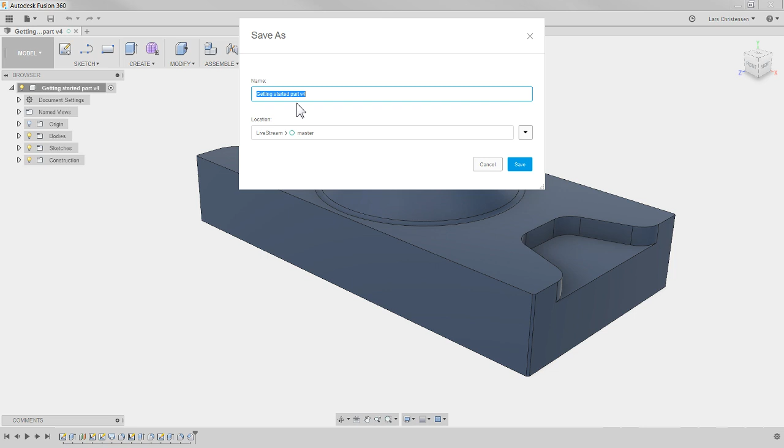So what I like to do is to go out and do a Save As, and then just give it another name. Let me just save this and get out of here. Oh, actually it was called up. Okay, so there's our original here, and then our new one comes right up here in the tree. So I kind of separate the two models out.

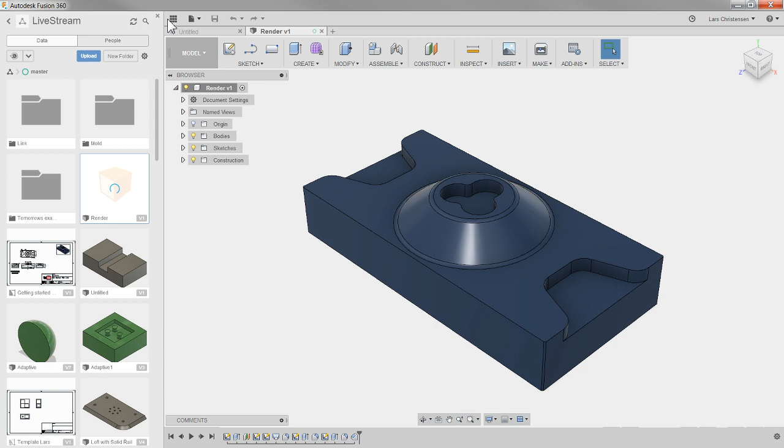All right, so this is for an absolute beginner. If you've never used the rendering inside of Fusion, I will kind of take you through the different steps. And by the way, there's some people watching these live streams who are absolutely awesome at this rendering. Feel free to share any of your models either in the live stream or in the comment area below. So this is the render workspace of Fusion 360.

Down in the bottom here, you get a rendering gallery that will give you a couple of shots of this model. This is also where many of your renderings will end up. I'm just going to minimize it by hitting this little box here because I want to get my interface.

Now I'll take you quickly through what each of these does, and then we'll go back in and play with them a little bit later.

The first one, you might already be familiar with this beach ball. That's the appearances, and it's the same appearance as we have if we were inside the model environment - we right click and do appearance. You'll see I already have an appearance on this model right now. I made it blue. By default, it is steel inside of Fusion, but for that CAM tutorial I just did, I wanted it to look a little different and not gray. There's enough gray on the shop floor.

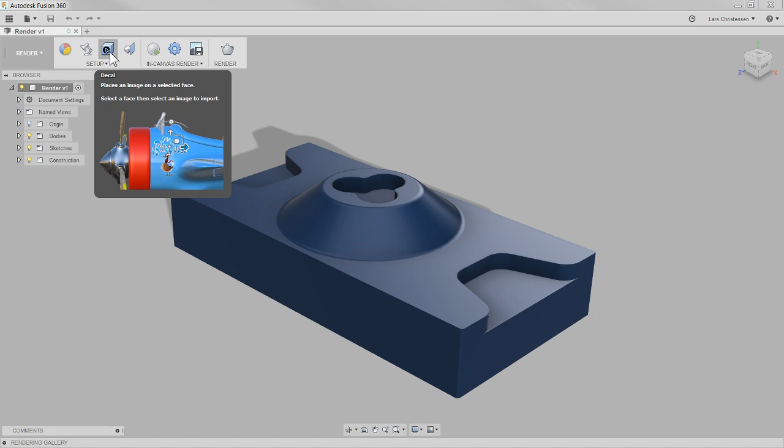So that is the standard appearance. Then we have this scene setting, which has to do with the surroundings around our model. We can also place decals in here, like we've done in a couple of live streams in the past in the standard model environment. If you go to insert, you'll see you have the same one in here - insert decal, same thing, you can insert an image.

Then we have this texture map control - we're going to come into that. But if I hover over it, you'll see we get this little drawing of a propeller. That propeller is made out of wood, and what we can do in texture map controls is control in what direction that grain might go.

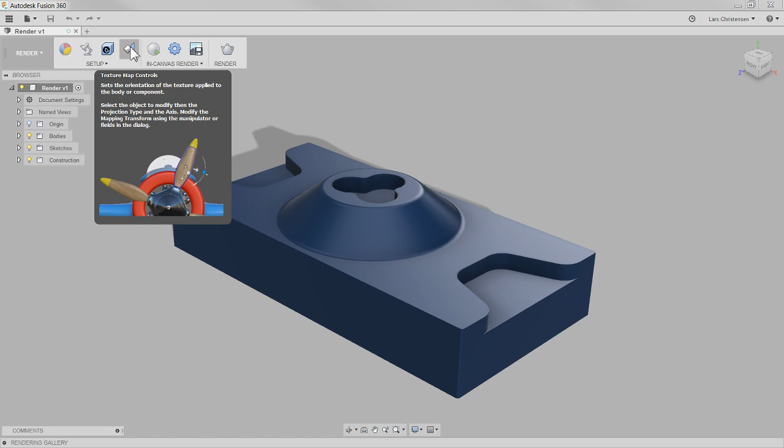Then we've got a couple of helpful tools here. There's something called in-canvas render, and then there's in-canvas render settings. If I jump into the settings for a second, there are two different modes - a fast one, and an advanced one, which is just a little higher quality. If you click fast, it says materials and lighting are simplified. We're going to come into this in just a second.

Another thing I wanted to make sure to mention, and I'll highlight it later - there's also a lock view. That's one of my favorite settings. I'll show you that in a second.

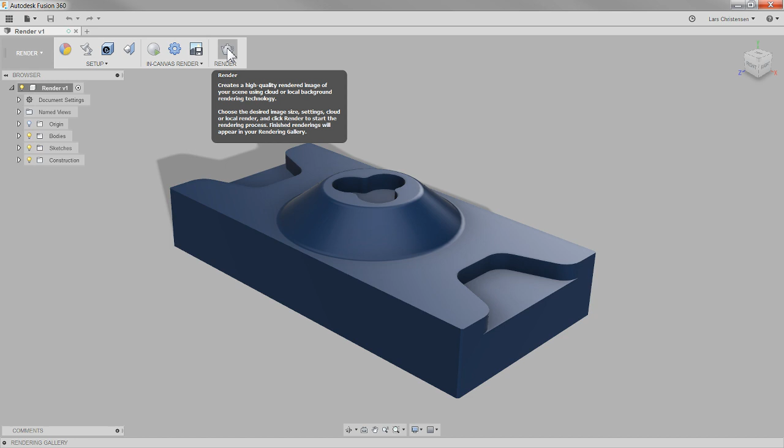So this is the in-canvas render. What happens is when you click on this, it will render inside, pixelating this model inside of this screen. This is really just used so you can get an idea of what is happening with your final render. Because when we're done setting everything up, the last thing you click on is the render button, which will create a JPEG or PNG image - that is our final result. That's what we're looking for, a nicely looking image we can use on a website, for a quote, or whatever, to impress your friends, whatever you're up to.

So, by default, you're thrown into this space. I'm not going to go too deep - we can definitely do other live streams where we go more in depth into things. But I wanted to give you what I think are enough tips to get you going if you've never played with it.

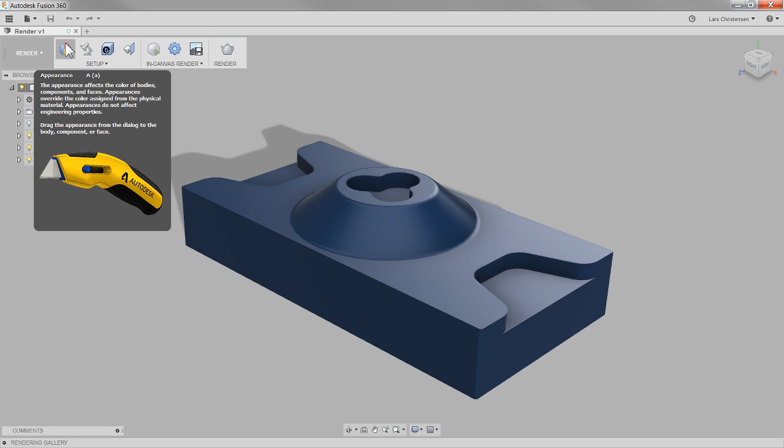So the first thing is your appearances, maybe also the most important thing here. You can click on the appearance to open up the appearances in here. Right now, by default, it is that blue color, but I could bring it back to the original satin just by dragging and dropping - that's the normal color inside of Fusion. But of course, you have all these different appearances that you can play with in here, and we're going to play a little bit with the different ones.

The next one is scene settings, and this is pretty important. I'll take you through some of the different things.

First thing is brightness. Probably don't want to play with that one in the beginning, but really what it does is brighten up the part here. The background doesn't change color with this, it's really just the model.

1000 lux is the default. Then you'll see an interesting thing: if I click this positioning here, we get this dialog, and if I grab this rotation bar, you'll see what happens.

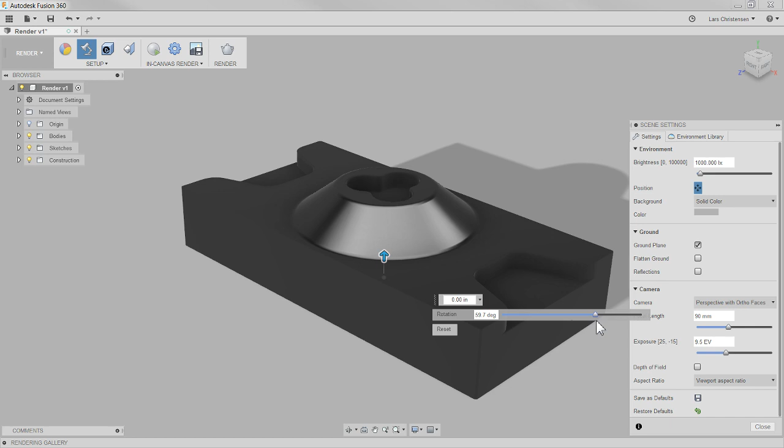You see how the shadow of the model is being moved around, and that goes in relationship to an environment. The best way I can explain this is that this model right now is living within a dome—think of a big sphere or dome around the part.

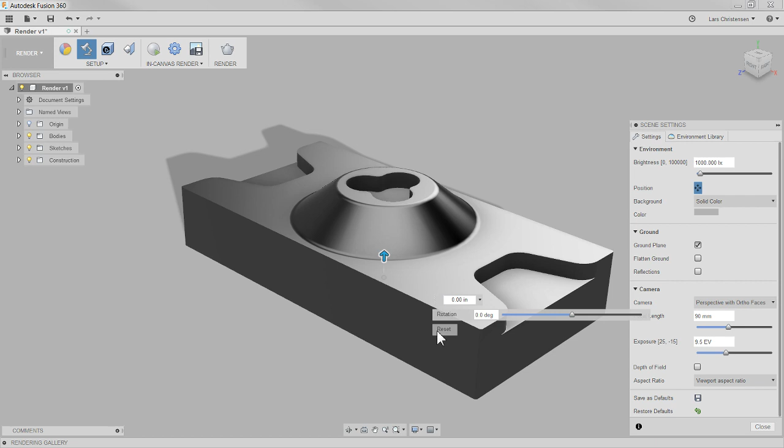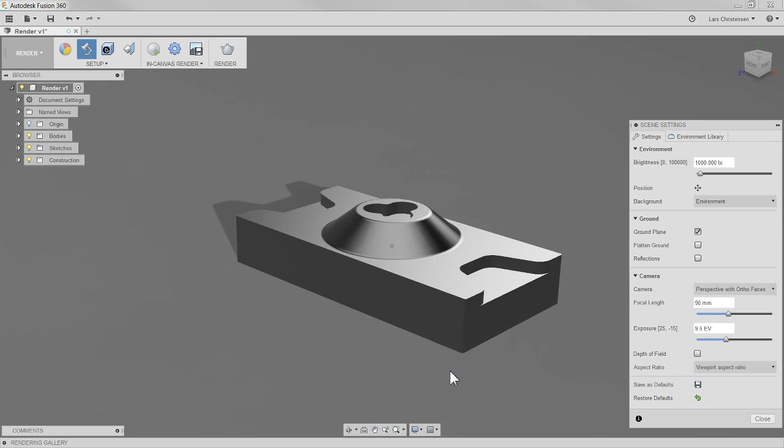Now if I hit reset here, and get out of the position, if I spin this one up and down, you'll see that even though I'm rotating around the model, I'm just rotating the model around. But if I change my background from a solid to what's called an environment, you see something changed on the screen, and if I spin the model around now, you'll see—whoa, what is that?

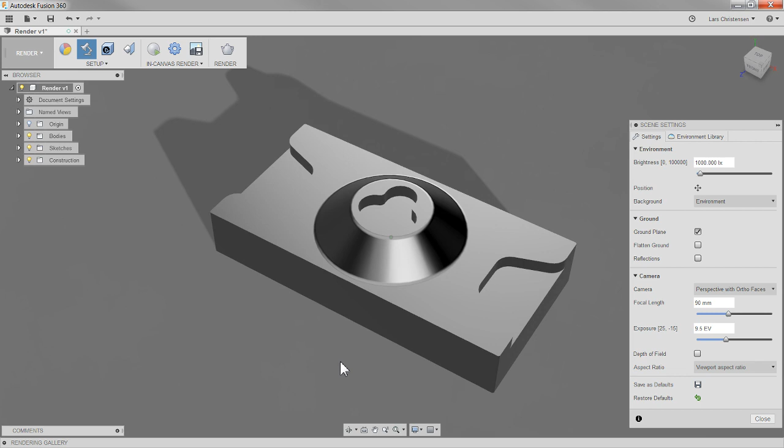That's like lights, like if you're getting your photograph taken, right? There's a light right there. So the model lives within this dome environment, and you can control that on the second tab.

There's a lot of options in here that you can play around with. The default is sharp highlights, there's some others too—if I click here and drag them in, it will change. You can see how I can change the lighting scene in here.

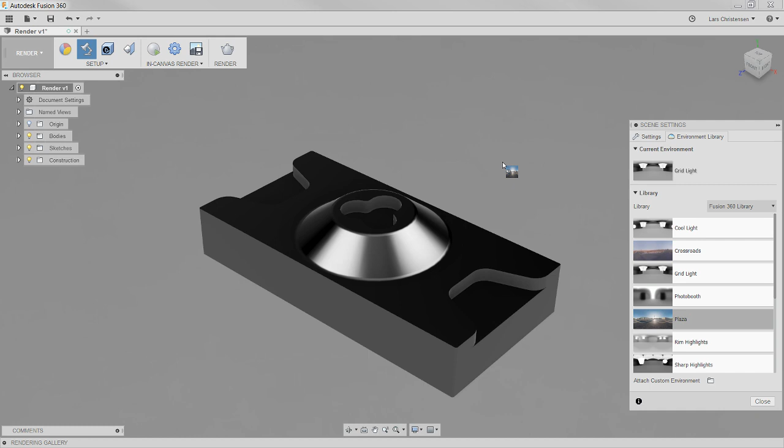Now you're probably thinking, okay, this is all great, but what about these other ones? Yes—if we drag this one in, we'll suddenly see that we're in a plaza. And if I roll around on the mouse, you'll actually see that it looks like we're somewhere else. That's that dome that we're living in here.

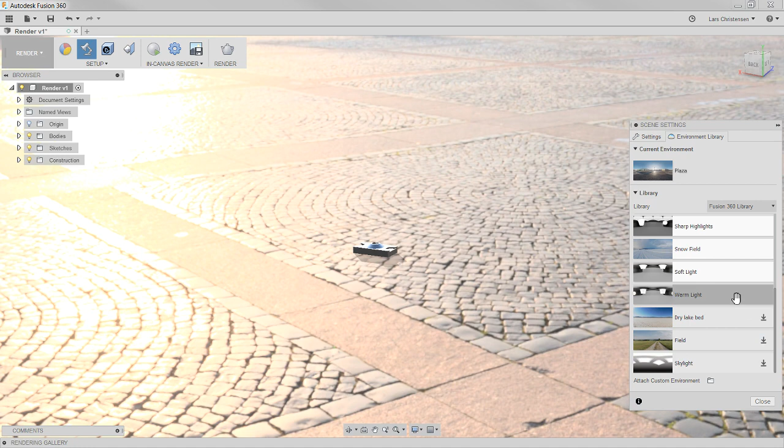There's all different kinds of environments in here, some you can download—you just click here and download them, it doesn't cost anything. One's called Snow Field, same kind of idea, but it's an environment that's a dome around the part. This kind of stuff is really great.

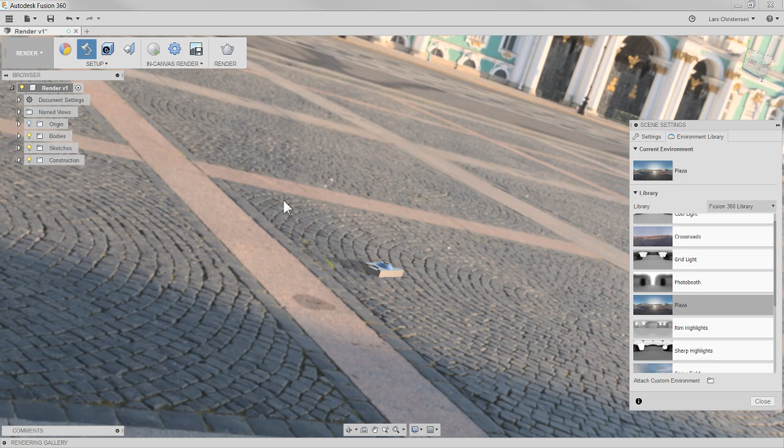Let me get the plaza back on. This stuff is really great if you're trying to render something like this—the plaza here has probably been used the most. If you see a rendering of a car or something like that, that's when you might place the car on this plaza.

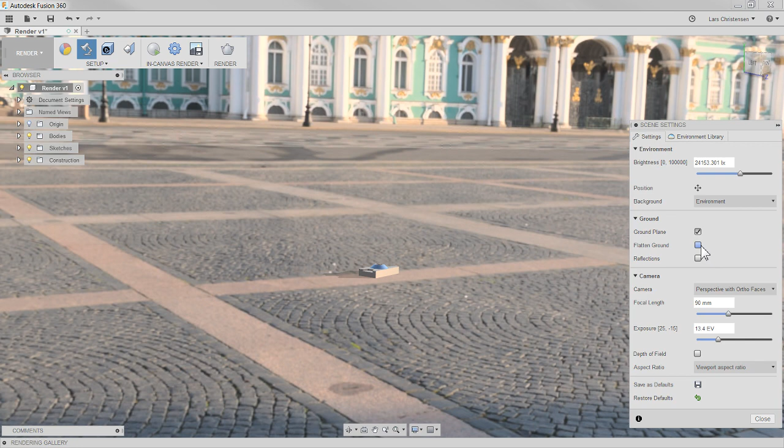And you've got a couple of options. We go back to the settings tab—there's a couple of things, for example flatten to ground, and you'll see that as soon as you do that, the model jumps to be flat to the ground. So the software is smart enough to know where that ground level is, and you can flatten to that ground.

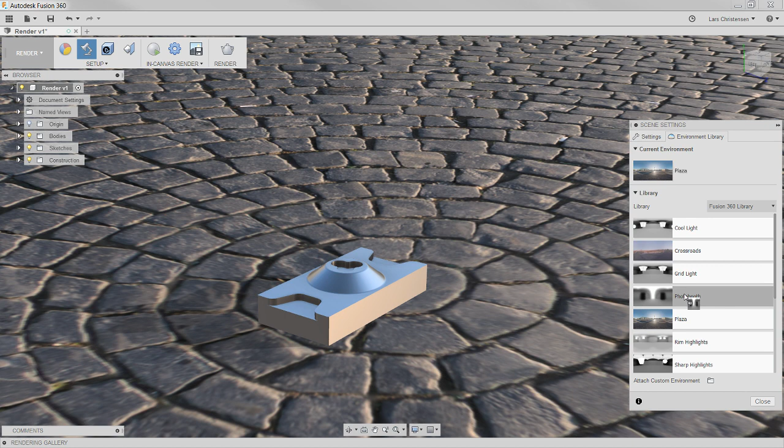But let's be honest, this model here—it would be a little weird if I sent this to a customer sitting in the middle of a plaza. That wouldn't really make much sense, right? So for us here, we maybe want to switch to something more professional for this part. So I'm going to take Photobooth and drag that over, and it gets a little less boring to look at, but probably a bit more realistic.

Again, I can go back to the settings tab—it's flattened to the ground. We can also turn reflections on, and when I do that, we see we get a bit of reflection in the bottom here, and you can turn that up and down. It's maybe not so obvious on the Photobooth, but on some of the other environments you can turn that on.

Now, another thing you need to know is that there is a camera in here, so you can change the focal length of the part. You can kind of adjust that. I normally don't play with this, I pretty much use the standard. Same thing with exposure, you can play around with it, but I'm not the biggest camera guy.

Depth of field is another one that can be nice to use, but more so on bigger parts, like a car or some big machine. When you check that one, you get to place a depth of field area with a little dot on the screen, wherever you click, and it adds blur around that. If you're looking far away at something, I normally find the blur is too high and have to turn it down. But for such a small part like we're doing here, I probably wouldn't even turn it on.

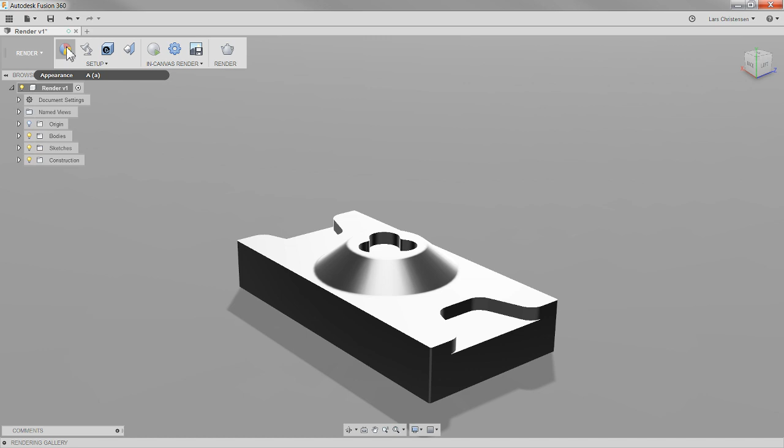Now, when we're looking at this model here right now, we put the steel on it, we can go in here and play with the environment. You saw we can play with the position of the lighting, for example, figuring out where we want our shadows and stuff like that. That's probably the most important thing here when we're looking at this part.

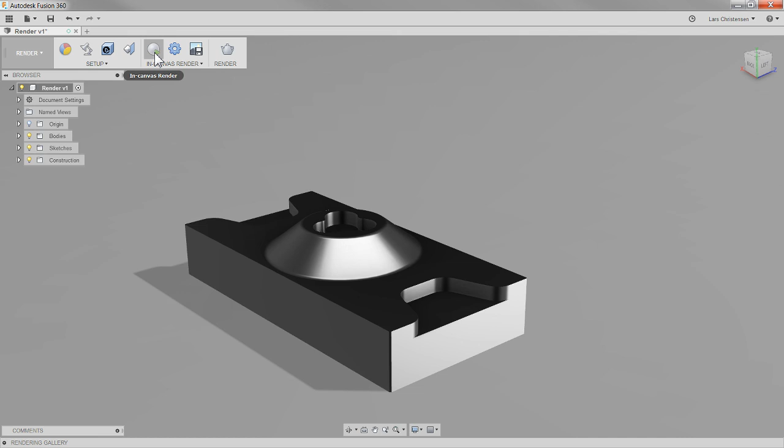Now if I turn on the in-canvas rendering over here, and you'll be turning this on and off to get an idea of what you're going to get, you'll see that the image gets kind of pixelated right now. Down at the bottom, you have a counter counting how long it's running and the duration it's processing these different pixels. You'll see there's an excellent, final, and infinite setting, and there's actually a little triad down here.

It might be hard to see on the live stream, but you can turn this down. Right now I'm just trying to get an idea about what I'm looking at on screen, so I might turn it down a little bit so it stops when it hits that little trigger down here. You can also hit pause, of course. But now it will stop when it hits this one and say it's done, and then the play button is ready here. So that's how it's going to fine-tune it and give us a view of what we have.

And again, this in-canvas view is just really giving you an idea about what you have before you go to actually render out, because rendering is going to take a little bit more time, as you will see in just a second. So this in-canvas is something you'll turn on and off many times in here.

Now I want to go back into the settings of the in-canvas and show you something. It says there's an advanced, which was the one we just used, and there's a fast one. The fast one goes a little bit faster because it really simplifies the material and the lighting. You can see how the model also changed. Still, fast can be great, especially if you have a big model and you're trying to dial things in, because that's really what we're trying to do here -- dial things in to make it look really nice.

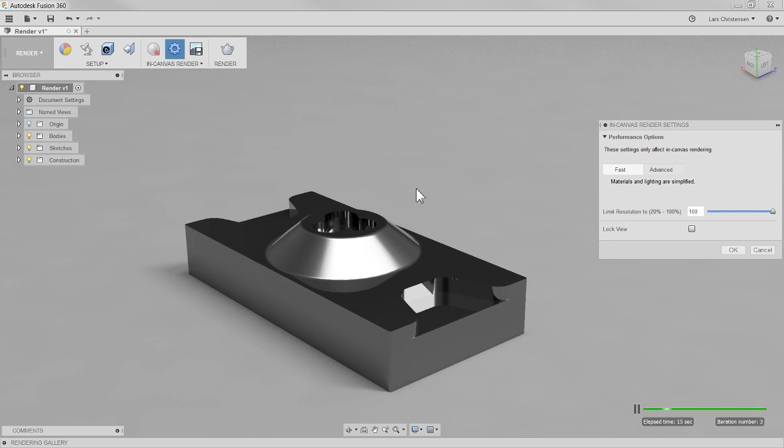But what I want to show you here is the lock view, because what happens is that if I move the model right now, you will see that every time I move the model, doesn't matter what I'm using, my mouse or whatever, it starts recalculating. So with lock view, if you have that one triggered, and that was in the settings here, now as it's doing this, I cannot move the model. And it comes down here and says, hey dude, the view is locked, so just chill for a second.

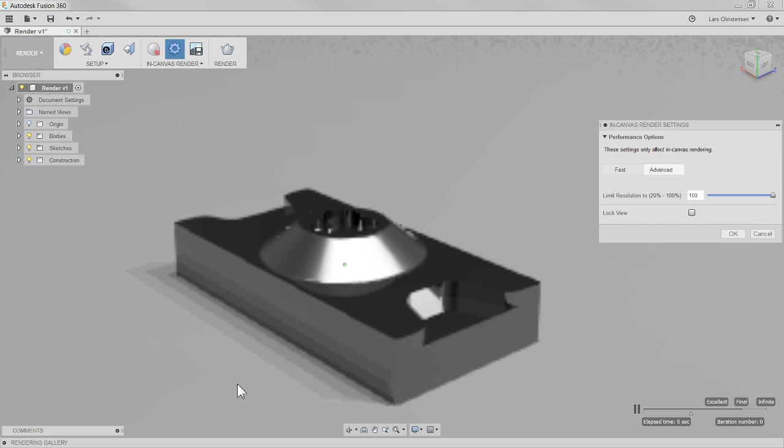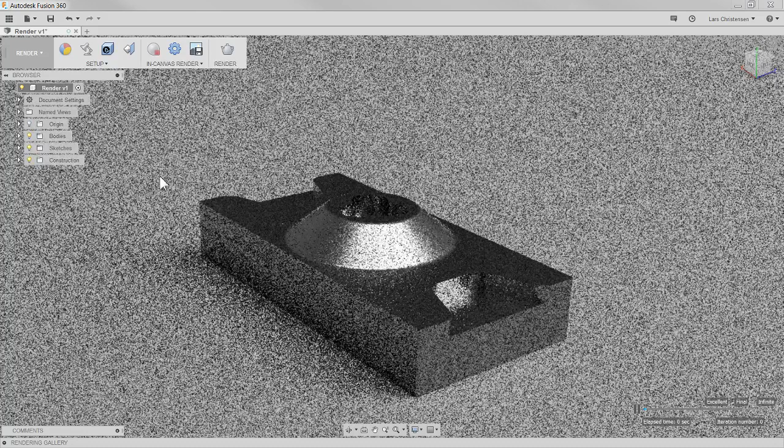And the reason I'm pointing that out is, you're out of in canvas, you applied your settings, you're all good, and then you're like, ooh, now I want to see what I get, and you hit in canvas and it's dialing, and then you're like, maybe I should rotate it, and then it does it all over again. You're like, man, I didn't want it to do that. So the lock view kind of helps with that, so you relax for a second and let it do what you want it to do.

So let's see here. We went through the textures, so that's pretty much appearances. We talked a little bit about the scenes. We're gonna go back to decal, texture a little bit later. And then we have the in canvas, but it's helpful. Again, it's calculating right now, making it better.

Now, here's my problem when it comes to rendering. That have been that this image that you're looking at right now, if I render that out and give you a picture of that, you probably are gonna be a little bit disappointed. This here is gray on gray. It doesn't really look great.

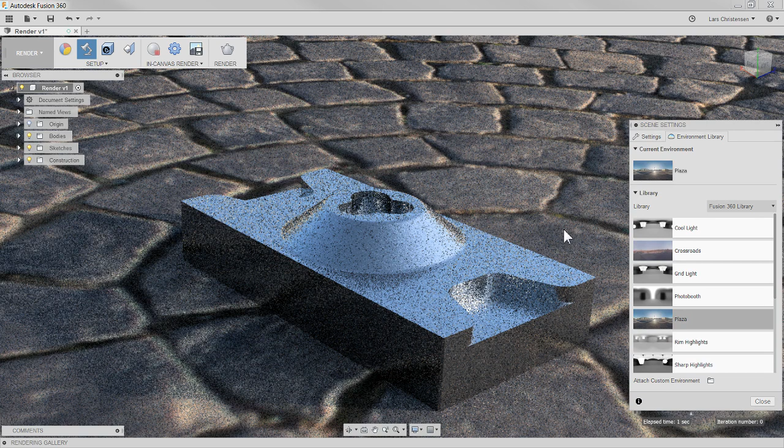We talked about that we could go in and change the appearance, the environment, right? We could go in and change to one of the ones that was a little bit more exciting, maybe. But again, this is really not what I'm looking for. Like somebody by accident, this part fell out of their pocket and landed on the ground.

So here is one of the things when it comes to rendering, and probably one of the best tips that I ever got from a good friend of mine. And that is that when it comes to make decent looking renderings, the trick is not just putting your part in there and render it. It's kind of like what is also around it.

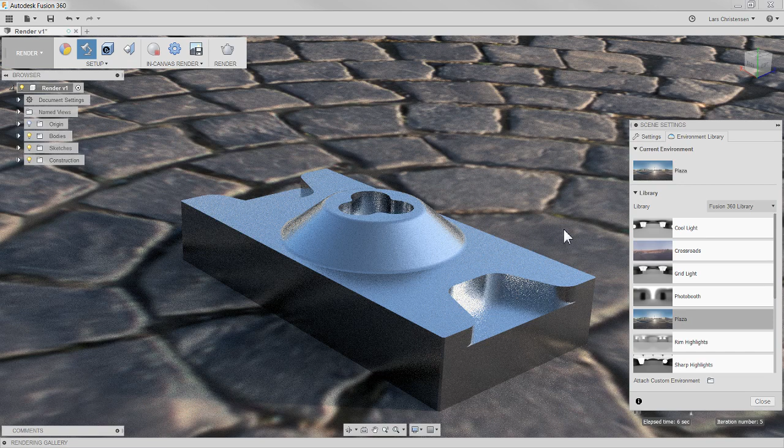And it kind of makes sense when you think about it like that. So whenever we see something appealing somewhere, there's other things around it. If you just saw a rendered iPhone, it wouldn't look great on like a billboard or something. But you never see that. You always see somebody interesting who's holding it, or something in the background, and that's really what's gonna make the render kind of stand out.

So let's take a look at that. So what I actually like to do when I render is to not be in the render mode in the beginning. Every time you see this, the view is locked, is because I'm trying to move the model around. The reason that most of these renders look, if you have problems getting them to look really appealing, is because they're just sitting out here in like a space. There's nothing kind of like surrounding that.

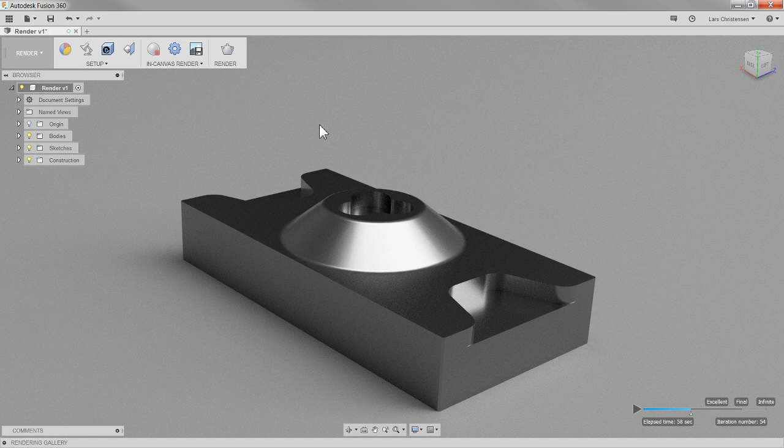The easiest way to work around that is actually creating your own kind of like environment or your own frames or whatever, I don't know what you want to call it. Check this out. I'm going to get out of the render environment. I'm going to go into a model environment. So there's our model. And this is one of the reasons that I name my files.

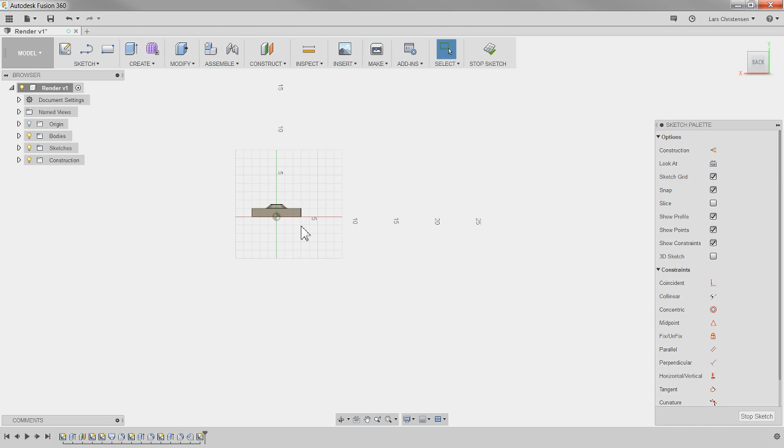I don't use my original files. I'm going to go in here and open up a sketch on the side of this part. And then I'm literally going to create, just with some lines, nothing fancy here. I got my default settings on here. I'm going to make an environment, like a line that goes across here, maybe to around here, up here. And this doesn't have to be accurate at all.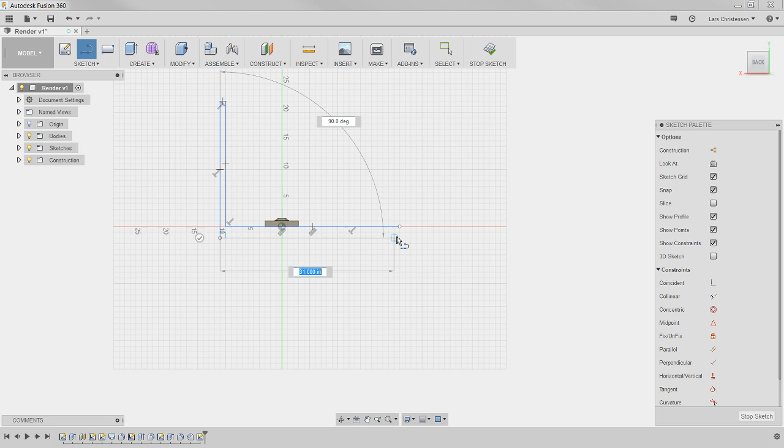Just something crazy like this sitting right here. And then I'm going to extrude that, hit E, and go symmetrical since it doesn't really matter. I'm going to make this big block here, and I'm making sure I don't want to join it. I'm going to make it a new body or a new component so it's not joined into the model, so make sure you do that.

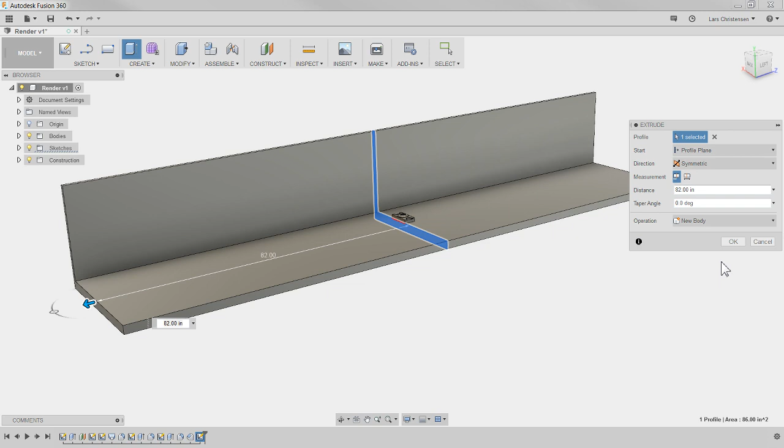So now we kind of have this place sitting here. I'm just going to zoom in, this should be pretty good I think. This kind of gives us a floor or a table, and this kind of gives us a wall. Now let's go back into the rendering environment.

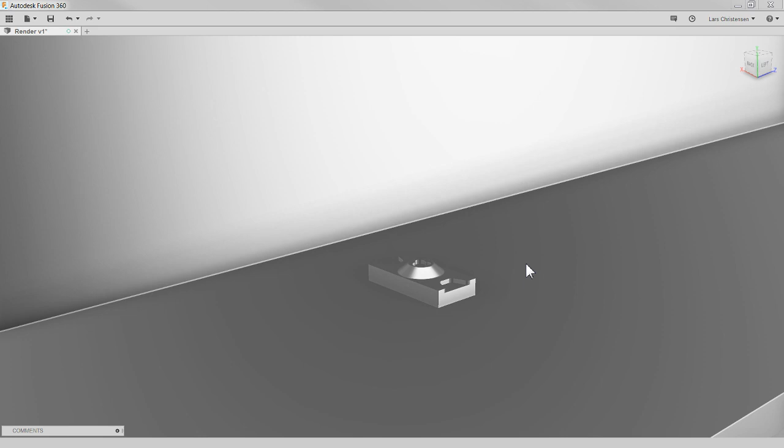So we come in here and we're looking at this, and we can see the photo booth doesn't look fantastic right now. But what I'm going to do is go into our appearance here and find a wood surface. I'm going to grab a finished wood surface. There's all these different surfaces in here, and you can download them by hitting the little arrow, whatever you want.

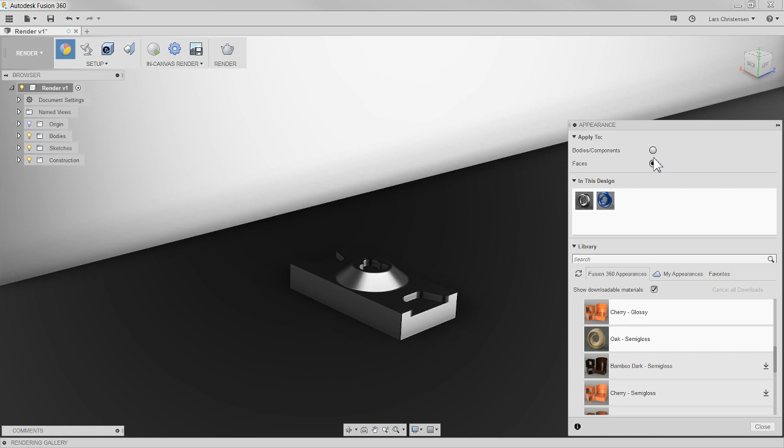I'm going to take this cherry and click face up here, so I'm placing it only on the face. I'm going to drag it over on this surface here. That actually kind of lightened everything up a little bit, right? Made it look like there's a surface here.

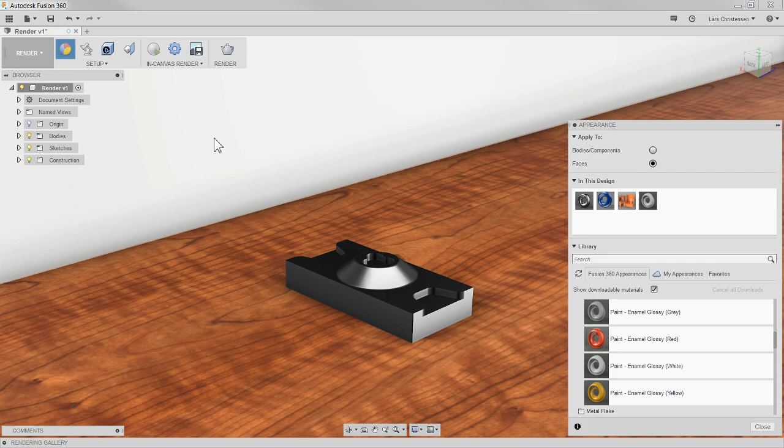For the back wall, I actually prefer to go up and use some kind of paint color. You can play around with whatever works best for you. I'm going to go with a glossy, and I'm just going to get a white glossy paint. White is good. I'm going to drag that up on that face up there, kind of lighten that up a little bit.

So now if I zoom out, you can see how we created this environment here. Zoom in so we can't see the edges. And now we can go back into our scene setting in here. We have it on photo booth.

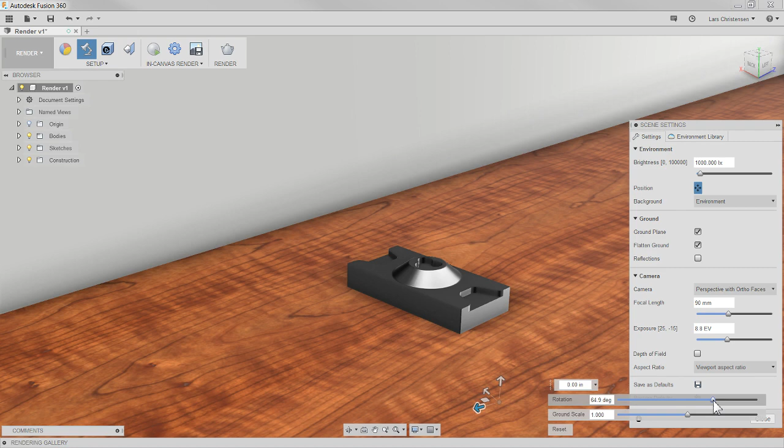I'm not sure if this is going to work or not, but let me hit position. Maybe we want to look at some different rotations on this and see how we like it. Ooh, that's the light shining right on it. So you can see how we can play around with this. We can actually move the lighting sources a little bit, and we can scale things.

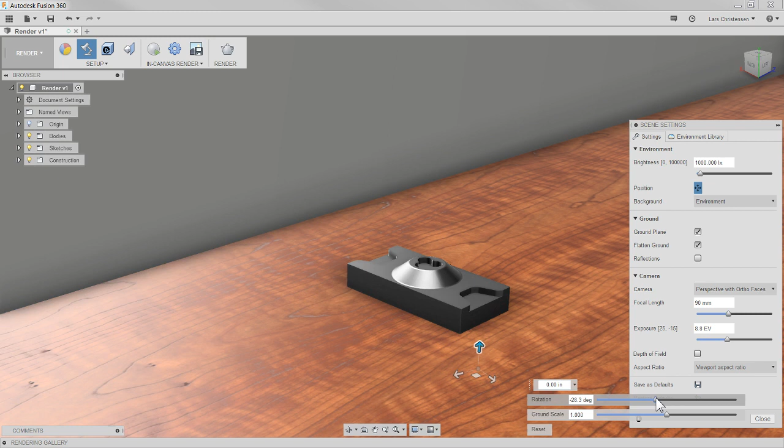So play around with this and try to get good lighting on your part to see where that fits. I don't really know what will be really good, so I'm going to leave it right here for now.

Now at this point, we could go in and hit that in-canvas render again and just get an idea about what we're going to get out of this. I'm going to run a little long today, so

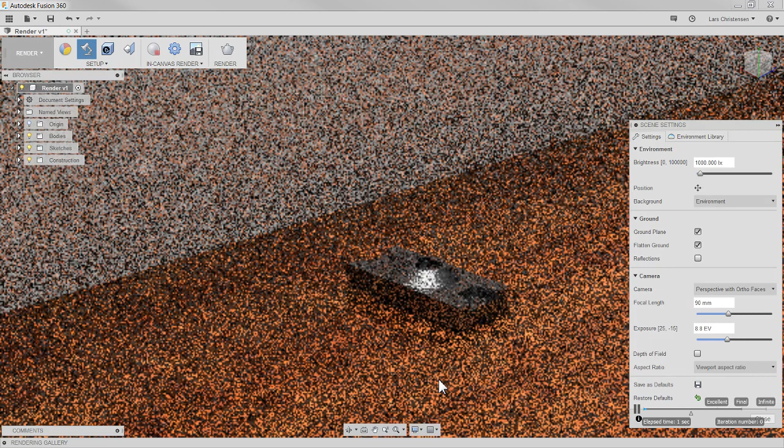Sorry about that, going for the half an hour. So we can see here how it starts rendering this out, giving us a preview that looked halfway decent maybe.

Now I'm not going to wait for it. We could try to go in and do the faster one and see how that will look, maybe a lot better. Turn that on.

Now I do see with this material here, and my mouse is kind of highlighting, I do see a reflection. I don't know if you can see the reflection in here. It may be because we're doing it fast, but it could also be because that steel has a high reflection in it. So just so you know that, and this is something we can get back into a lot deeper later on.

If you right click on a material, and this is going to be different for different types of materials—we should definitely do another live stream of this—you can actually go in and edit it, and turn the roughness up or down on it.

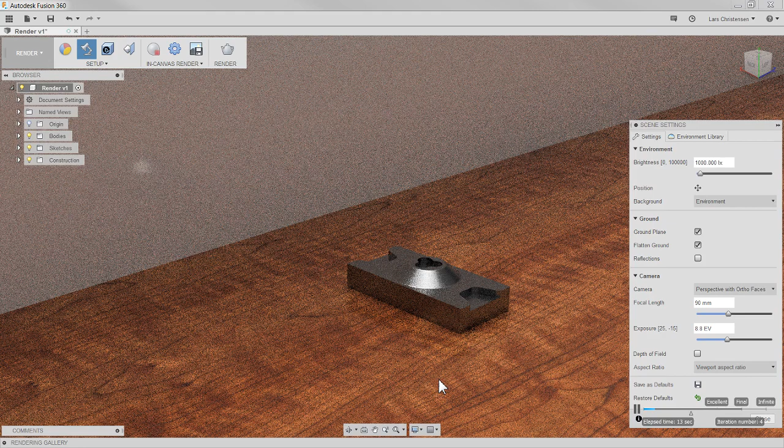So if I make it rougher, then we will get less shine in it. And you can hit the advanced, and then you actually come in here and you get a lot more options in here that you can do. This depends on different materials, so you can really play with a lot of this.

One of the things I want to show is this texture in here. Steel doesn't have any texture to it, but if we go into a brushed linear short, that might actually have it. So let's apply that on here. Now we applied that into it.

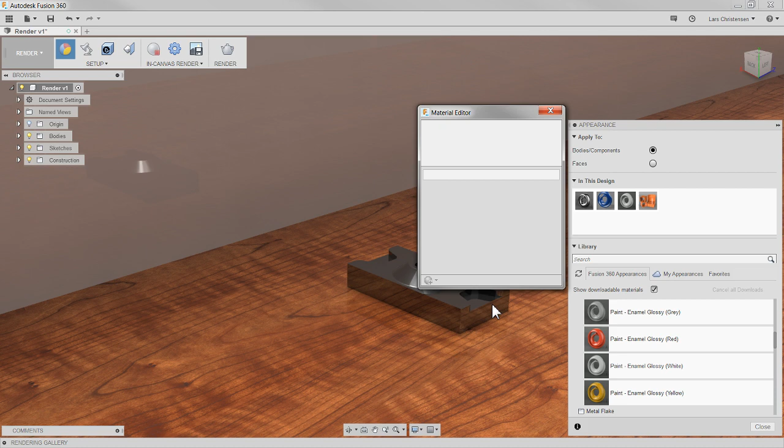Now let me get out of the in-canvas render and let's zoom in a little bit. I hope this shows up on the live stream, that you can see here how we got lines from this brushed material right now. That is what this texture map control can be used for.

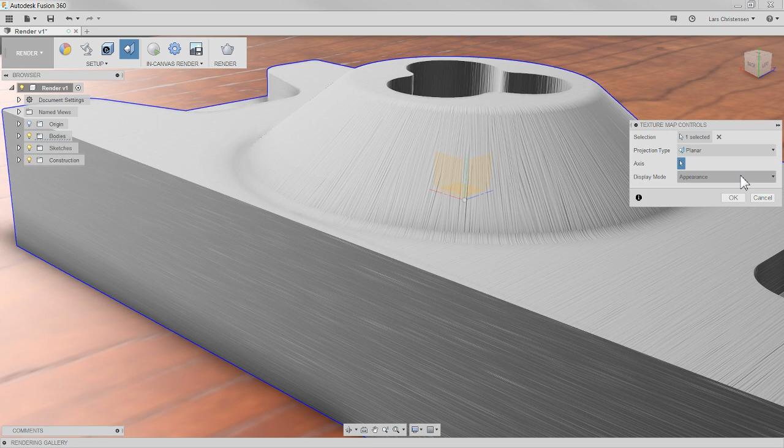So if I click on that and select the component, you will see the projection type right now is automatic, but you can actually do it like planar, and then it looks for an axis that it wants to do around. If I select this axis here, you will see that now something is going planar that way, almost like you slice through the part. If I rotate the planar rotation, you might see how that works. So you can control that this way.

You can turn it into a box, spherical, maybe look a little weird for this. Cylindrical is also an option. So this gives us an option to play around with the textures in here and make it look more like what we want.

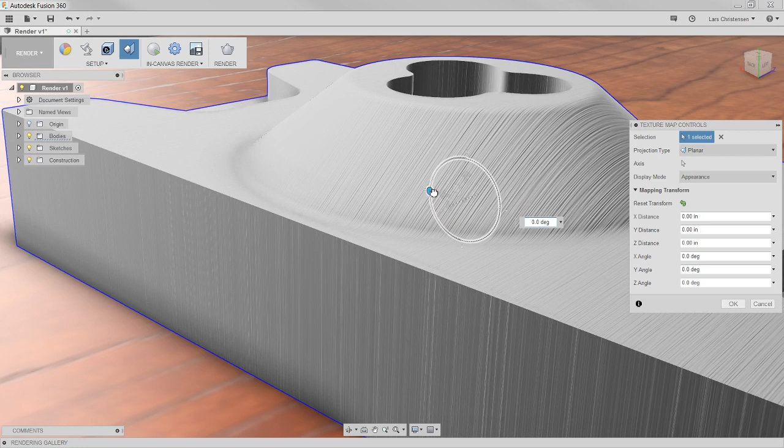I'm going to leave this right here and bear with the final result. So here, by putting this wooden plate underneath it and maybe giving it a bit of a different texture, we're kind of playing around with making this a little bit more interesting.

Now, to add to that, here's a neat little idea. I actually created a drawing of this, a pretty poor drawing, I admit that. I created a PDF of this part a little bit earlier, put our YouTube logo in there. And so now, if I change that into an image, I can add that with a decal.

So if I click on that, select the face I want it on - I want it on the table - select the image, that's going to be the one on my desktop right there, and then it's going to bring it in here.

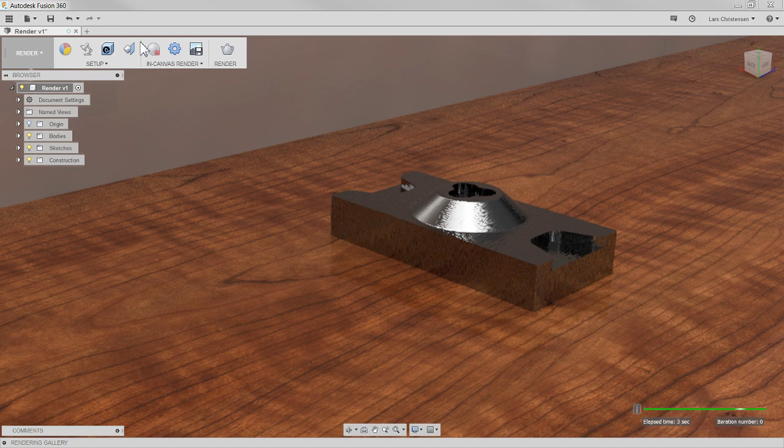Now you get a lot of options in here. You can scale things, and I can do that on this little one over here too. So let me just try to move this around a little bit.

Oh, I have the in-canvas on, that's why it takes so long. Turn that off.

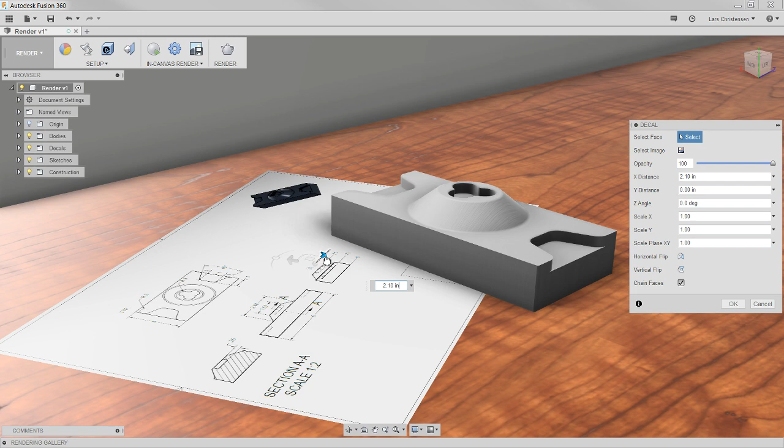So if we do something like this, I don't know, that might make it a little bit more interesting, having the drawing and the part sitting on the table here. Turn the in-canvas on again, so it starts rendering it. That makes the whole thing a little bit interesting. Now I maybe don't want the reflection as you see over here on the part, but this looks a little bit more interesting.

Now you will see that the brushed finish doesn't look great in here, but remember we are on the fast one. If we go to the more advanced one, you will probably see as it's solving this that it will get a little bit better.

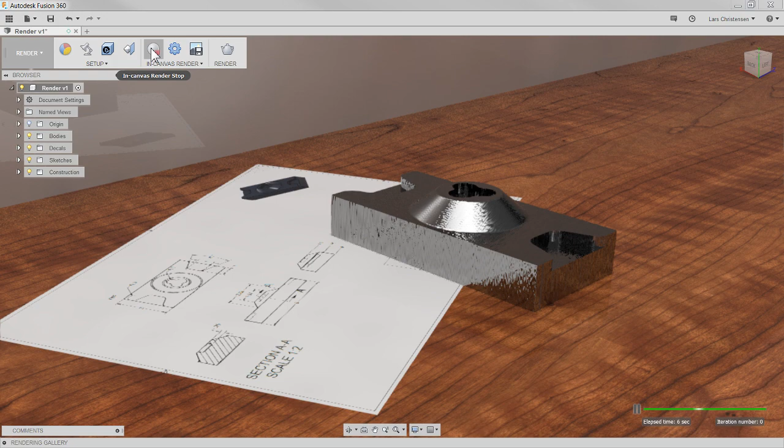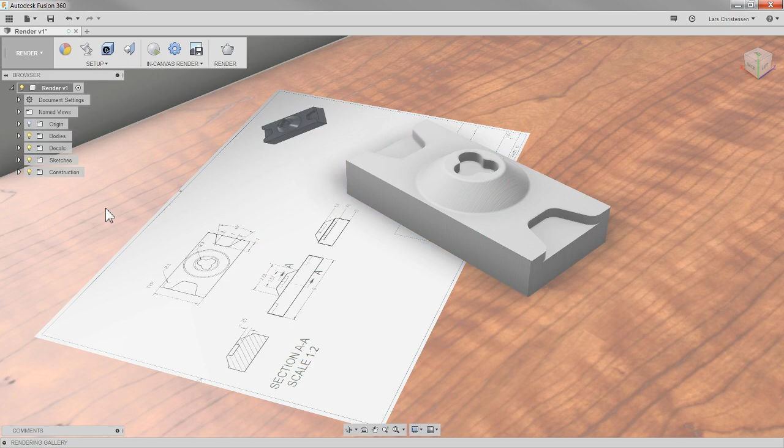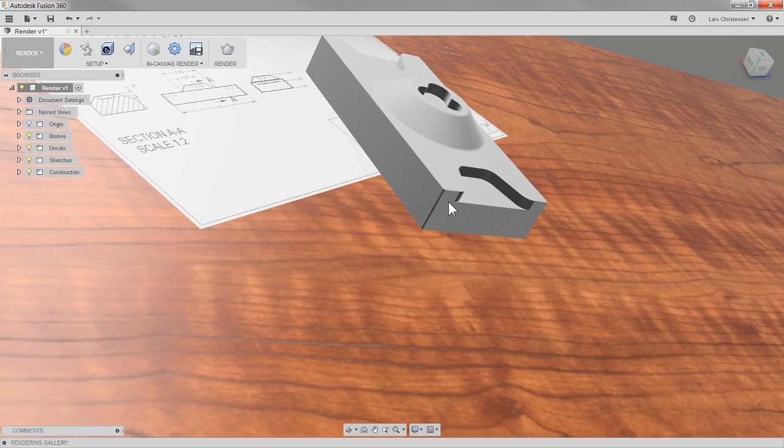Another thing I wanted to show is when you are placing your angle of how you're looking at the part, try not to be perfectly isometric. If I click on the cube, don't go straight down, straight on - don't go top down, that's not gonna look too great. Also don't use just the isometric views that come in here. Maybe try to find an interesting angle. If I did this, the part's gonna fall off the table, so try to play around with this a little bit.

These renderings don't have to be 100% perfect either. You can do multiple of them, try different things. When we get to the point where we're happy, or we think we're close to what we want, that's when you go in and say we're going to do a final render.

Now you get different options in here, and I definitely recommend you look into them. But two things you need to know: you can choose either to do a cloud render or a local render. Local render means your machine does all the solving. With cloud render, you send it up to the cloud, and it's rendered on the servers up there.

That means you could render 5 or 6 different views of this and still work on your laptop. If you're on local render and you start rendering, you might find out that everything slows down.

Everybody who downloads the free version of Fusion 360 gets some cloud credits. You can see this will require 2 cloud credits at the final stage of quality. That's the second thing you need to know: there's a standard quality and a final quality. Standard quality costs only 1 cloud credit, and there's a frequently asked question right here too. Final costs 2 cloud credits.

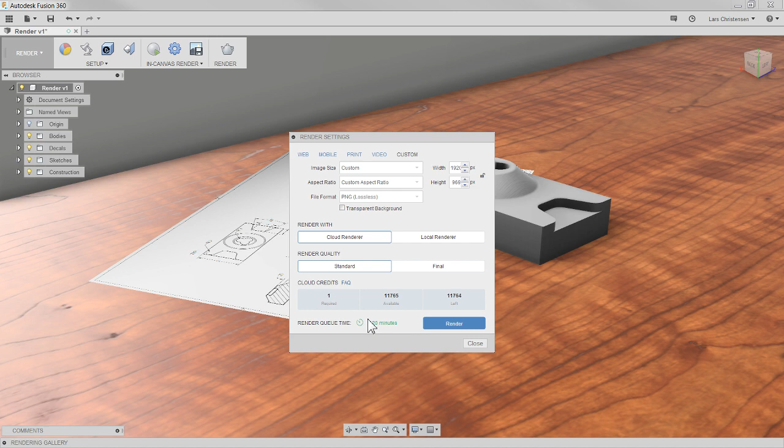When you're happy with what you got, you hit render, and the rendering starts. The rendering will appear down here - remember how the first thing I did was close this little window down here? It'll actually appear down here whenever it's done.

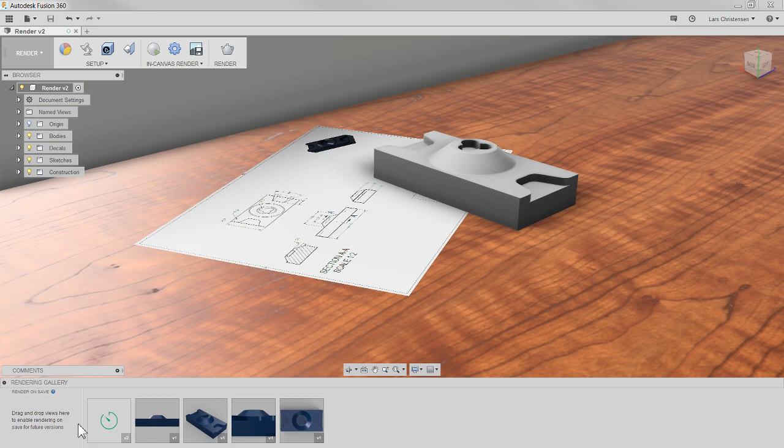Depending on how busy it is, I'm doing it up on the cloud right now - it's going to take maybe just a few minutes. For something like this, I'd say less than 10 minutes for sure to render it out. Of course, we could also go to the advanced settings and hit in-canvas to see what we're getting right now.

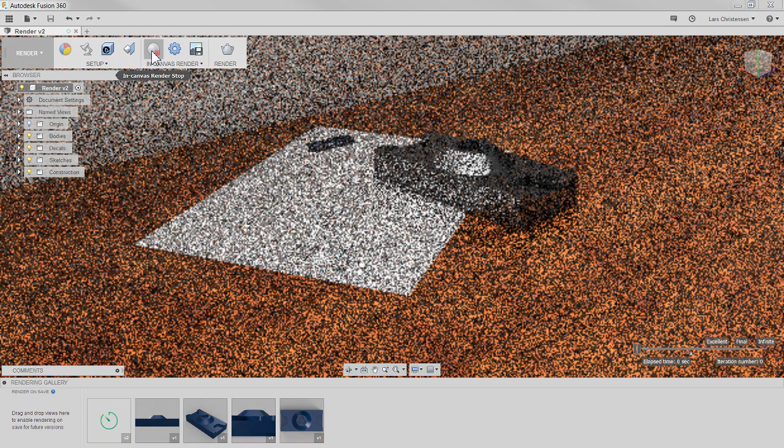I really hope this gives you an idea of what you can do with this rendering tool. Think about how you can use this at your shop or company to make some cool images you can use as marketing on your website, brochures, send to friends to impress them, or for quotes or other stuff. It's pretty straightforward to go in here and set it up.

Go out and look at the gallery too, the Autodesk gallery. There are people in there doing much better work than I think I ever do. But the trick about creating that boundary, that L shape I did, and placing the parts in - I really think that makes a huge difference.

So I'm still waiting for my cloud render to come back. I don't think it's gonna come back before I run out of stuff to talk about. So when it's done rendering, I'm gonna take that PNG and throw it down in the description area of the video. If you're watching the recording, go down there and click on it - you can see the final result.

Like I said, if I was going to do this, I would probably do maybe 5 different renders with some different lighting. We tried the photo booth, maybe try some of the other lightings in there, play with the position of it, the shadows, and try to get all that right. It seems like that's how it goes for me - I've got to do like 5 or 6 of them.